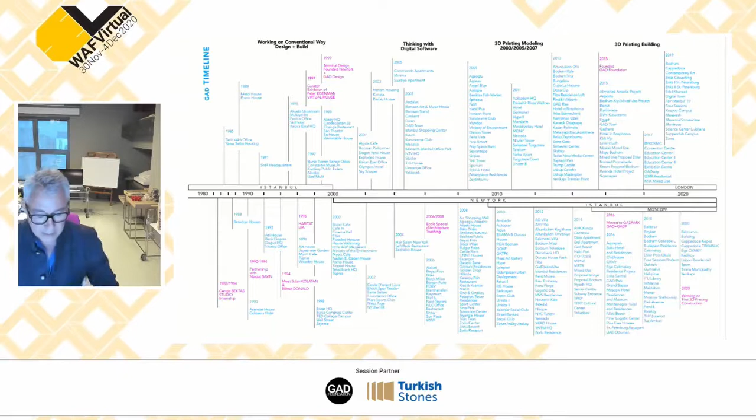I like to work on architecture with stone, because stone is, as I explained, a 12,000 year old fantastic material, and not only material but also a statement tool for architects. What does that mean? The structural statement — you can do something with the structural statement with that material.

As a material, you can do something, also a technical statement, and also an art statement — what we need as architects to do something for our civilization.

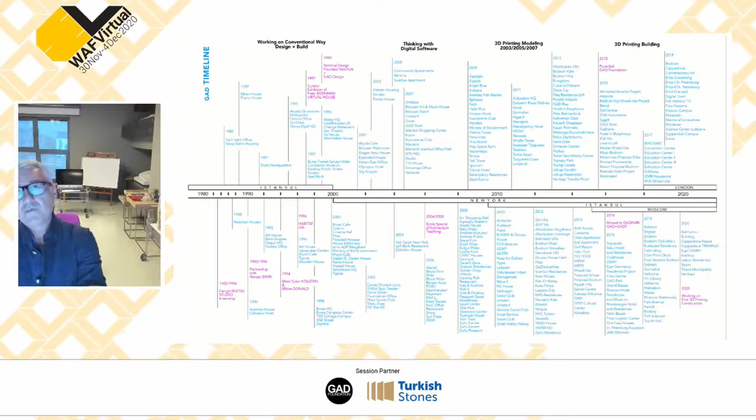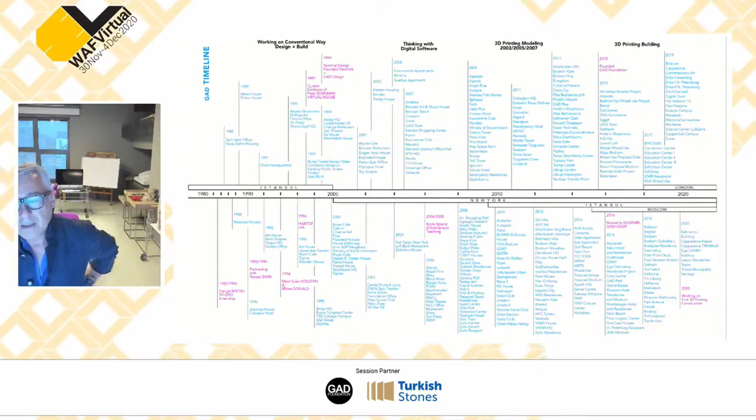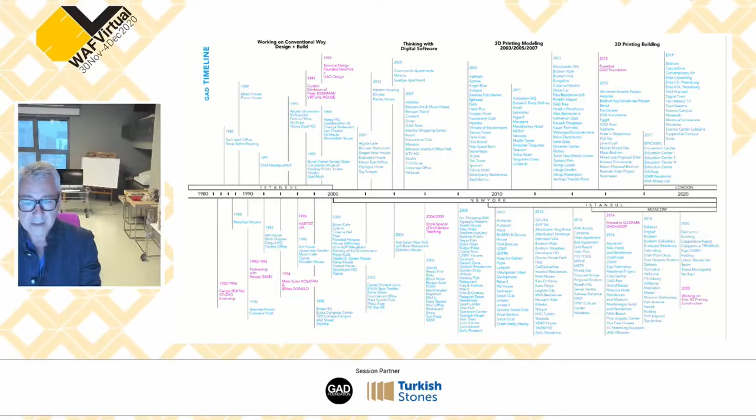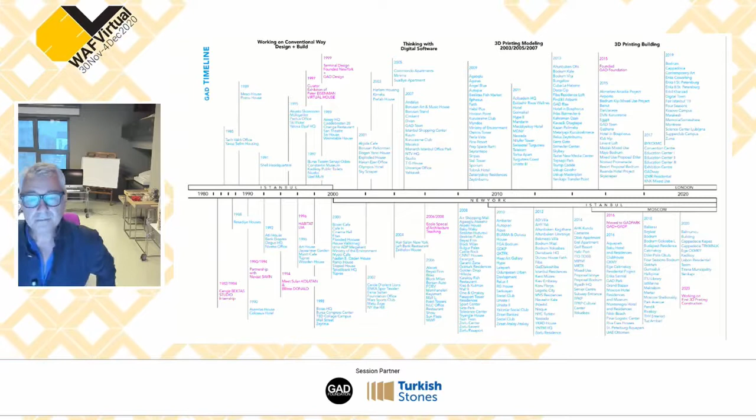When I was a small child, I visited with my family some ancient heritage sites like Ephesus, and also Miletus, Priene and Bergama. It's a different kind of place, and also Cappadocia really influenced me — those places inspired me to do something for people, for our civilization, and also to explain this to myself.

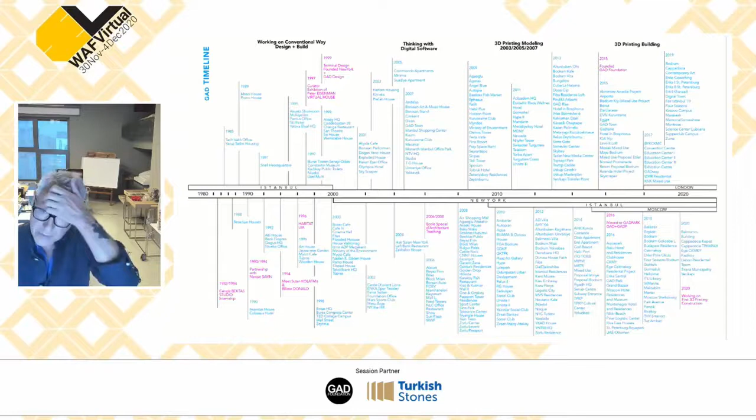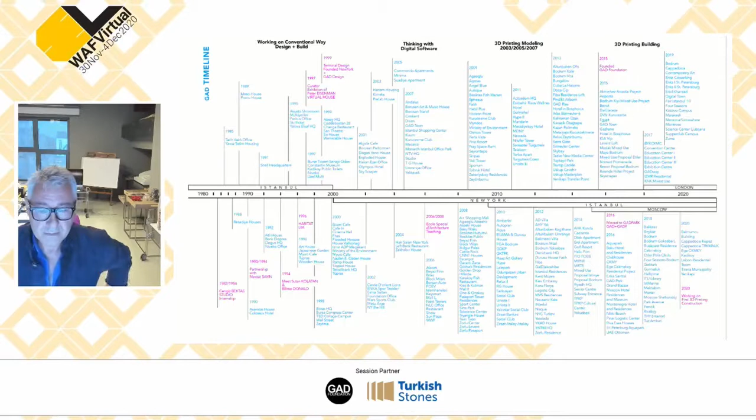What I explained before — designing something, building something, adding something onto our planet, it's a very complicated issue. But at the end of the game, as architects we would like to explain ourselves, our civilization, and our idea with these kinds of statements. Stone helps you do something and explain your idea and civilization to the next generation.

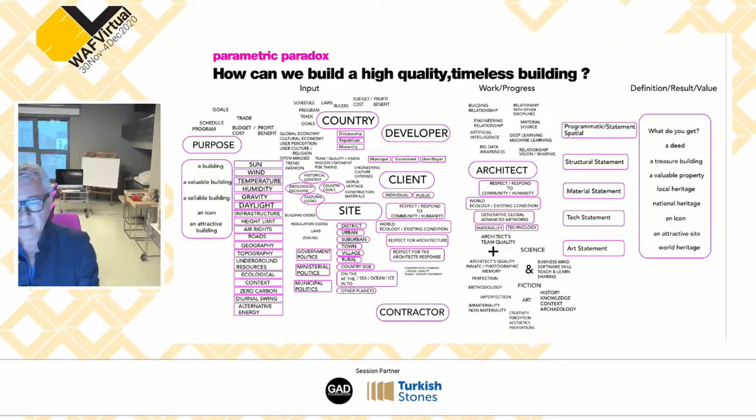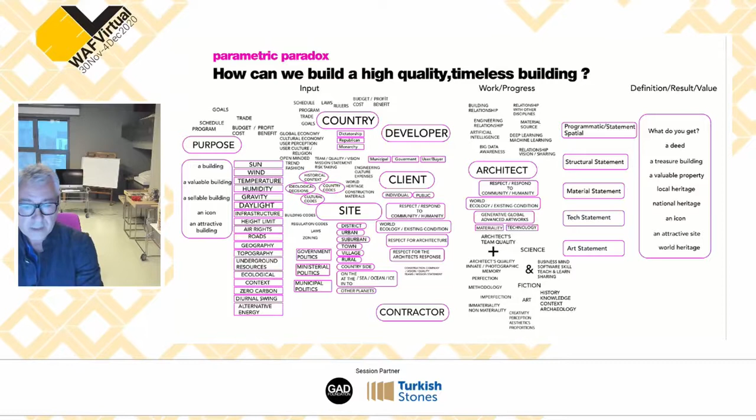Because stone is normally a 30 million year old material, not produced yesterday or last week by machines. It's totally natural, and it gives you ideas. Please next, you can continue.

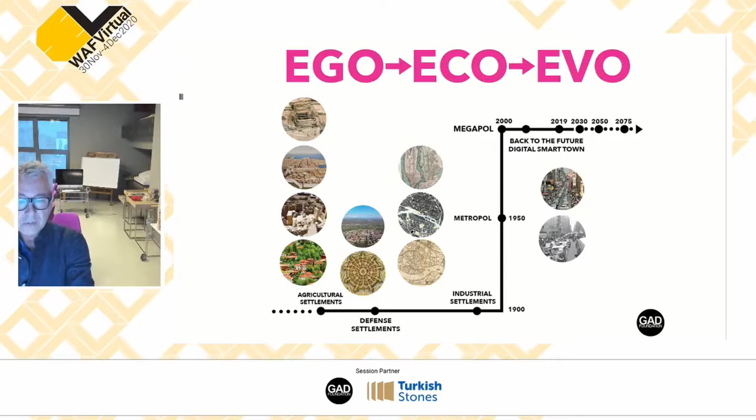Today we are interested in evolution — not just architects making statements about ego, not the ecological things, but we are interested in evolution. I would like to show you some of our projects, what we do, what we did.

We are looking now, in this pandemic time, at what our future cities and dwellings will be.

The first project is in Ortaköy, Istanbul, in the middle of Ortaköy, in the middle of our Bosphorus and our city, surrounded by nature.

What we did was create an architecture, making an architecture, finding a form, and designing not only the building but also giving back to nature what we add to our planet — also as a big garden on the top.

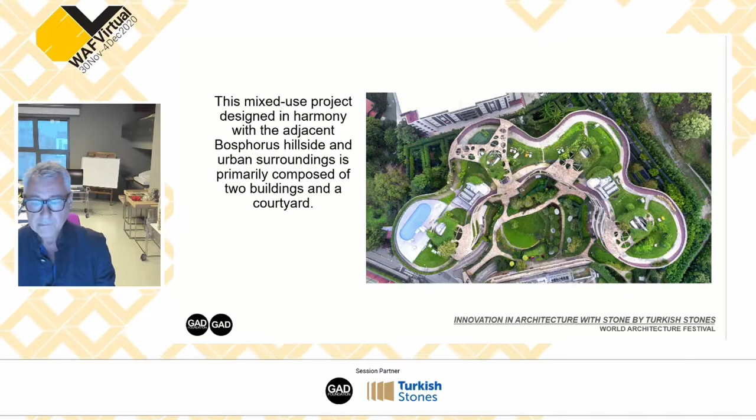We used as material the Turkish stone, let's say the Anatolian stone. I prefer the Anatolian stone — the name is Ünye.

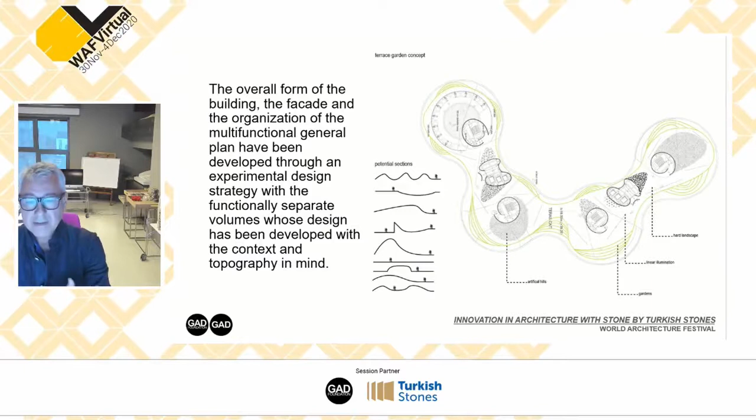You can see we made not only housing projects, but also created an envelope — maybe not only the envelope, but it also gave our architecture not only a shape, but also a garden and a 30 million year old face.

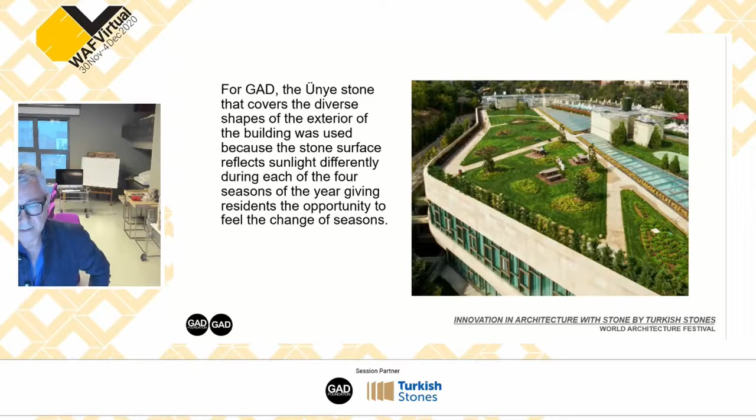Next, please. We used software tools, physical modeling, and also digital modeling for these projects.

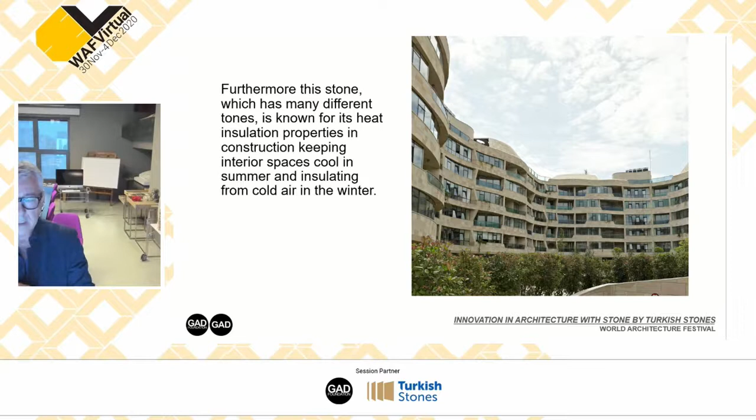What we try to do is give more daylight, and also give more daily life not only to the envelope but also on the top of the building — a sustainable life for our residents.

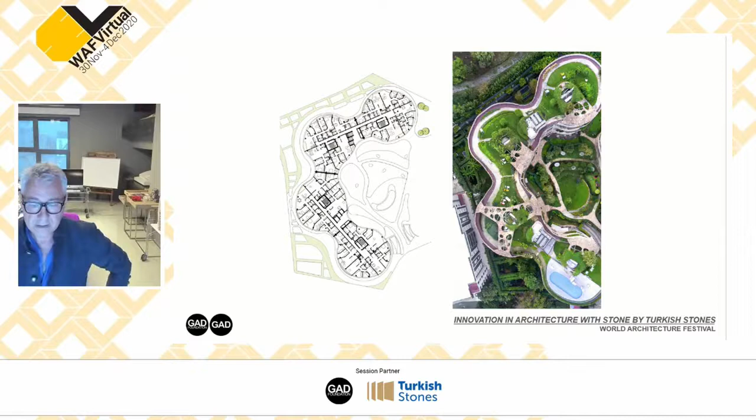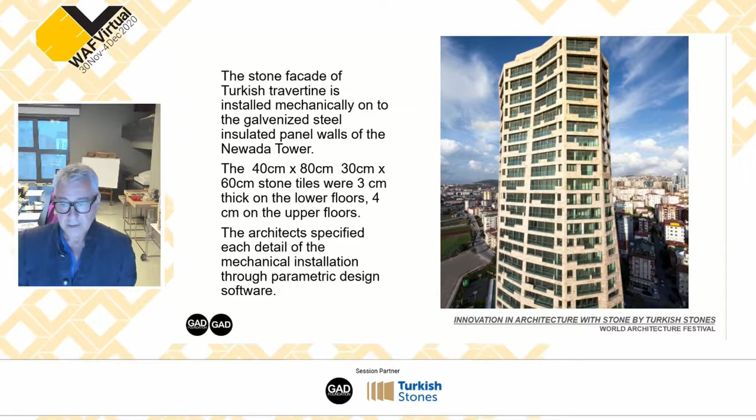Let's move forward to the other projects since time is clicking. There's another project called the Newada, in the same city, Istanbul. The first one was on the European side; this one is on the Asian side. You can see the fantastic view, and we tried giving the building a shape, not just making a form.

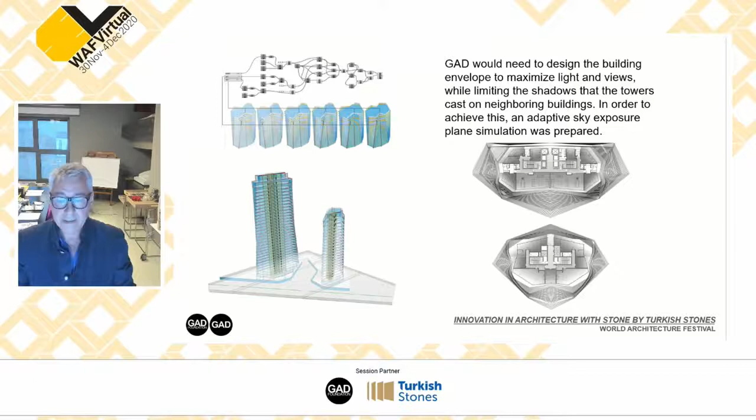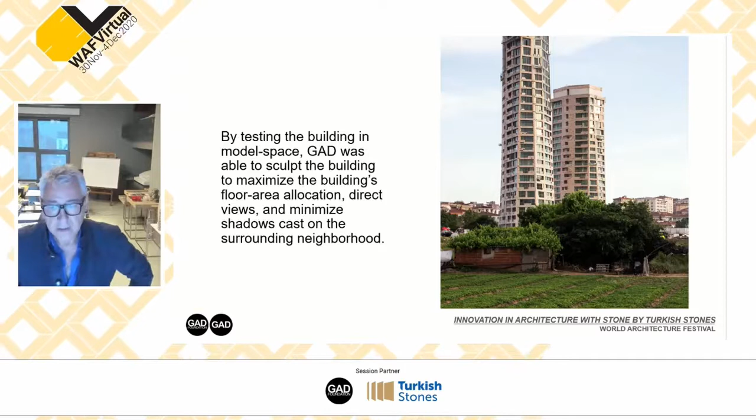Creating the inside with more light, more daylight, more view directed to the sea, and then the Prince Islands. You can see the two buildings with different shapes.

Some details about the facade systems. We always discussed in Istanbul what the weather conditions are like. How can we design like New York or Miami? New York is chilly and it's not easy to create a balcony and outside life. But Miami has the opposite, and Istanbul is in between. Therefore we tried different alternative solutions: a balcony that's protected, but not like New York, not like Miami - in between, let's say.

The third project is about Cappadocia. Gökhan, if you can wrap up in the next minute or so. Okay, next.

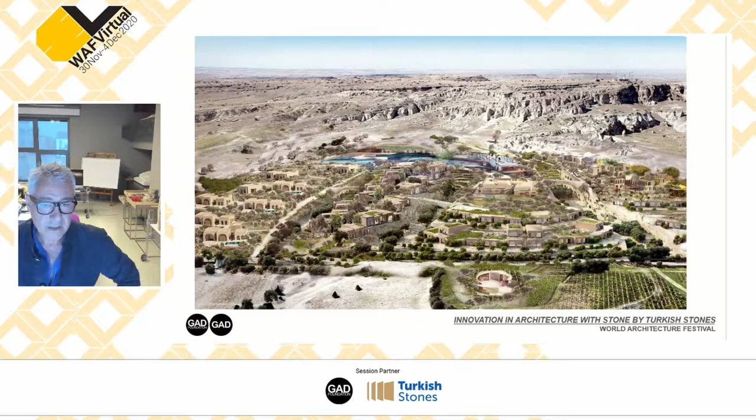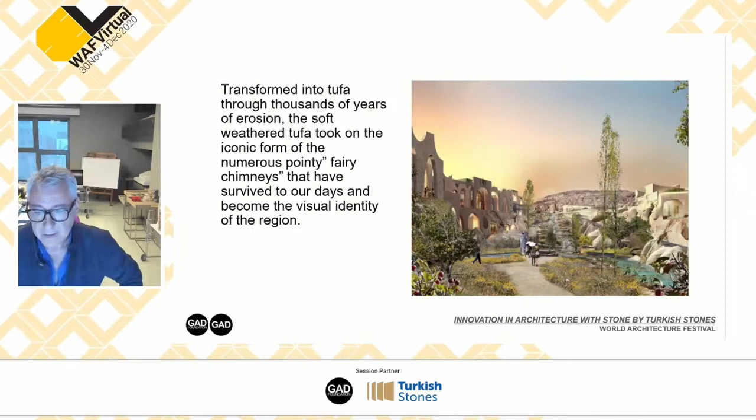Cappadocia is a fantastic place because the existing conditions are fantastic, totally made by stone. You can click to our website and see some details. It's an amazing historic area, and the earth is totally made by nature. We tried using the same materials, the nature materials, to design something.

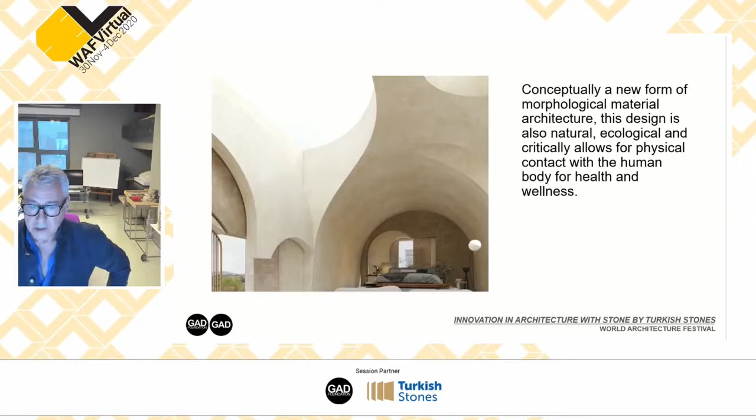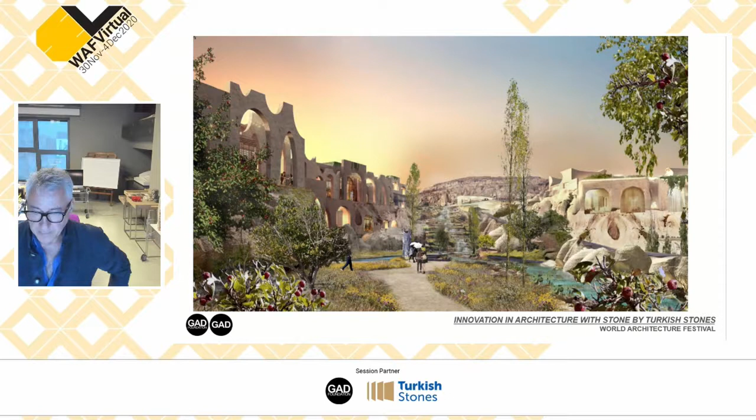So here we can see the Anatolian, wide and deep varieties of natural stone. Here in Anatolia, in Kayseri, we have volcanic type stones, basalts, and different limestones working together.

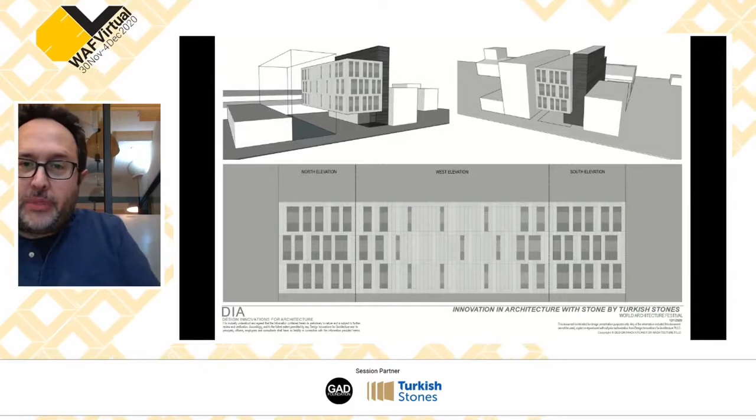Next slide. So the first thing we did, because it's in a flood zone, was hover the tenant floors and put the parking on the ground floor. When we looked at the building, we had the more utilitarian side of the building, the core, pushed to the side, and then the occupant floor plates create like a box, hovering above that vacant ground floor. We thought of this box to be a little more porous - we wanted to bring some porosity to it, but at the same time we were thinking of using this resilient material.

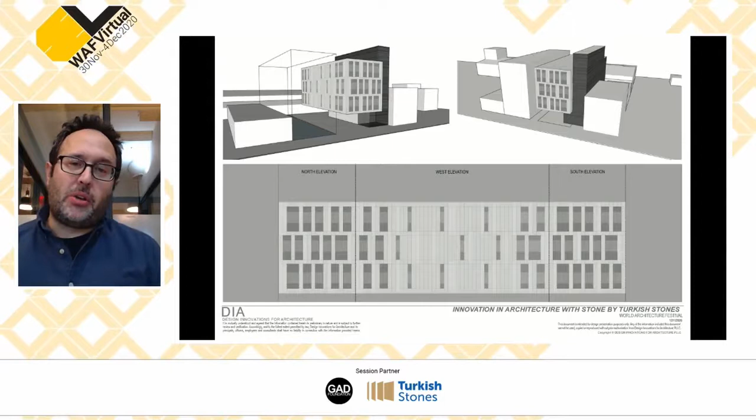Next. So, going hand in hand, we looked for this kind of inspiration in nature - a material we could use on the facade of the building, which is basalt. We were inspired by it. We looked at the basalt columns in nature and how we could use this as a reminiscent of our facade, how it could be more porous to more opaque in this kind of vertical rhythm that we could create. Basalt is also used in manufacturing, in industry - it's something that relates to this building.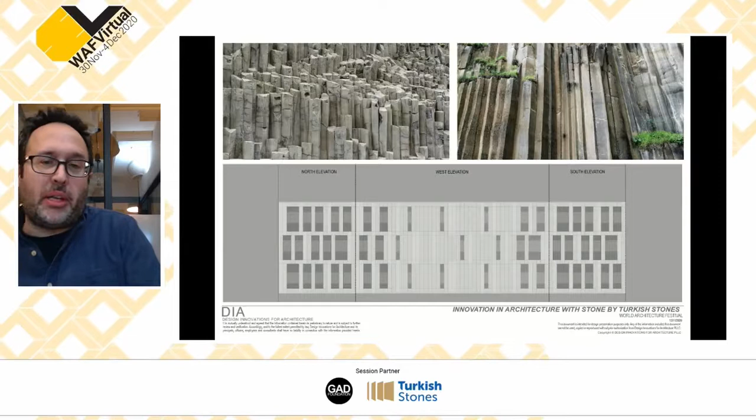Next. Well, we actually looked at basalt, and diabase and gabbro - these are intrusive igneous rocks, while basalt is extrusive. We ended up using diabase because of the color we wanted to blend with other colors in the building, such as highlighting the exterior stair in red, which goes really well with the diabase color. Next.

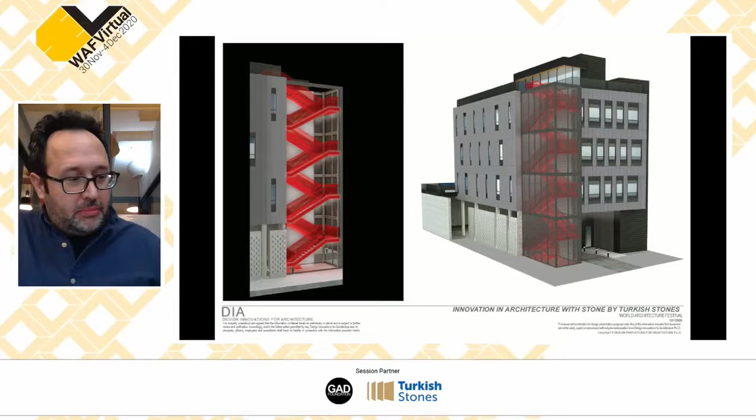So you can see the exterior stair in red color, and we also continue this contrast with the gray, and the shadows and the light and the color, how they can actually create this vibrance.

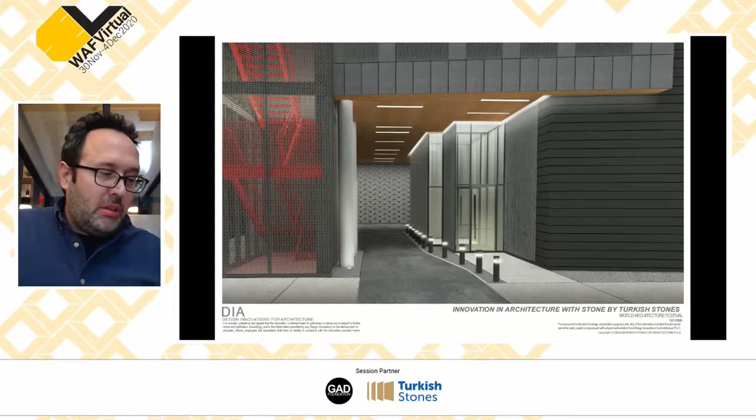One of the feature elements is the hovered ceiling at the ground level. But we didn't stop there - we took it inside, where we also introduced color. Again, another feature element is the interior circulation, the heart of the building inside.

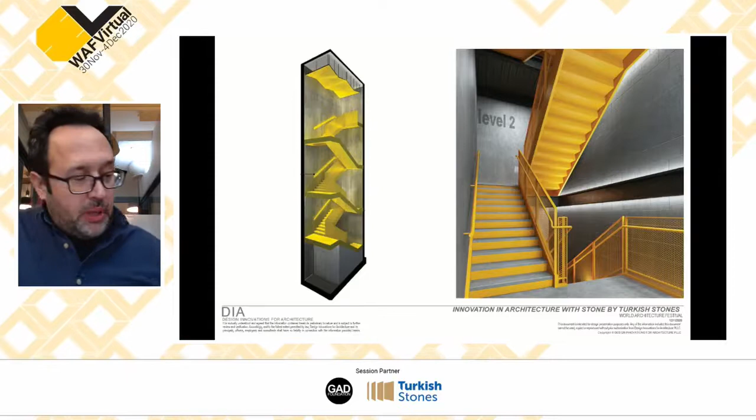And we even got carried away - we were looking at some colored shadows on the CMU blocks of the garage. We made it three-dimensional, and we tried to see if we could actually see the dancing shadows and make them in color.

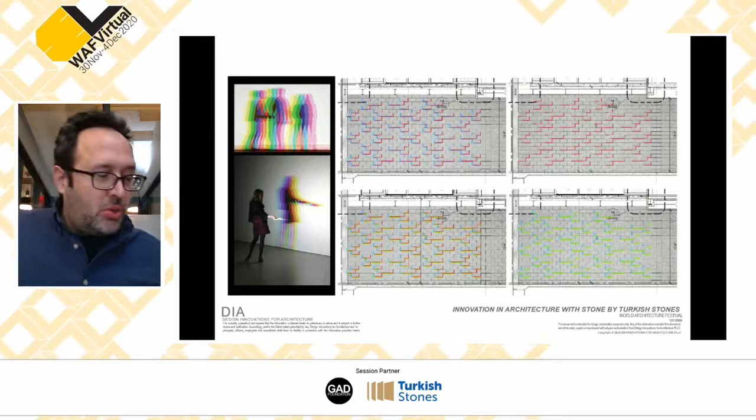Going back to the facade, as I was saying, we were looking for something resilient, and the material itself, basalt, is resilient. But the cladding process, the traditional cladding process of thin veneer stone cladding, is not that resilient. Stone, even though it has enormous compressive strength, is very brittle, especially against wind loads, earthquake, or other blast related forces.

It's very fragile, and to kind of combat against this fragility, the bad thing we do is actually increase the thickness of natural stone. And I always believe that that's kind of an irresponsible way of using stone, as it is not a renewable material. At some point, we will actually consume all the stone on Earth.

So how to use stone more responsibly - I always like the approach where you use the material at its most minimal amount. So we went with using an ultra thin stone base, 5 millimeters thick, and it was bonded to honeycomb backing, reinforced by honeycomb backing.

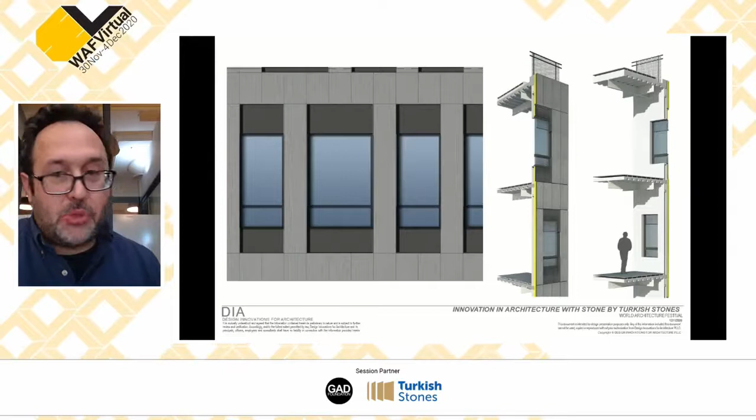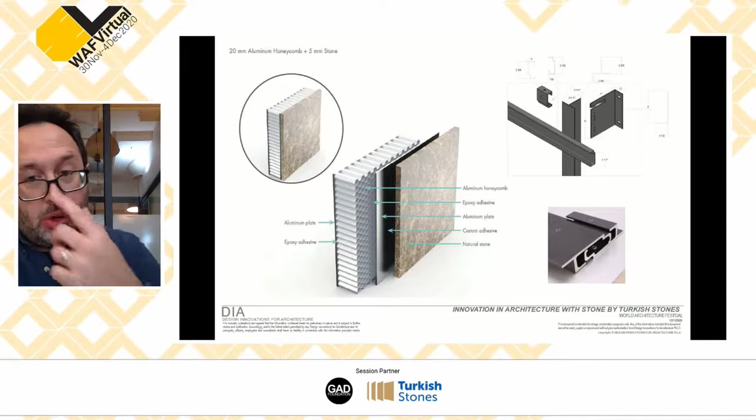That allowed us to create a very light stone cladding facade, and also create a larger cavity where we could have adequate insulation in the cavity, rather than having that behind the substrate. So you see the assembly: the ultra thin stone layer adhered to an aluminum plate, then bonded to honeycomb, and at the back again another aluminum plate, and then this is held by clips hung onto the horizontal struts, and then the vertical strut is connected to the brackets, which is also connected to the metal stud wall.

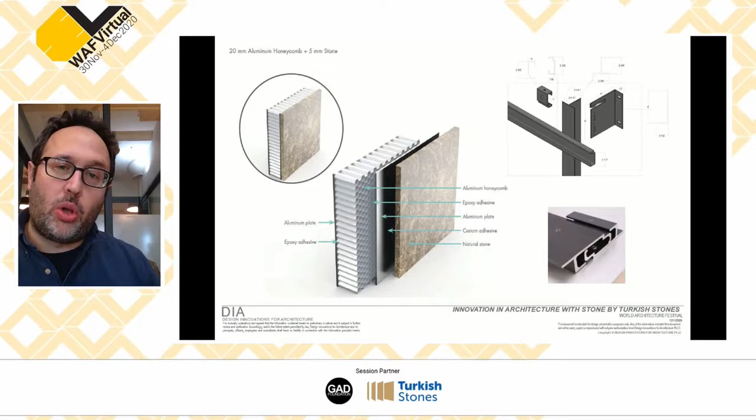This is a very light system compared to the traditional use of thin veneer stone. Usually you got to have 3 centimeter or 1 3/16-inch stone held by robust steel brackets anchored to a masonry CMU wall, or a very heavy-duty steel substrate. In this case, we were able to put the light stone panels directly onto the metal stud wall in our building.

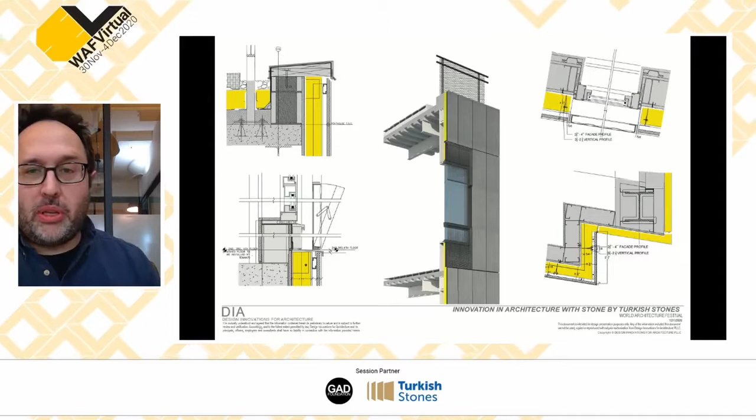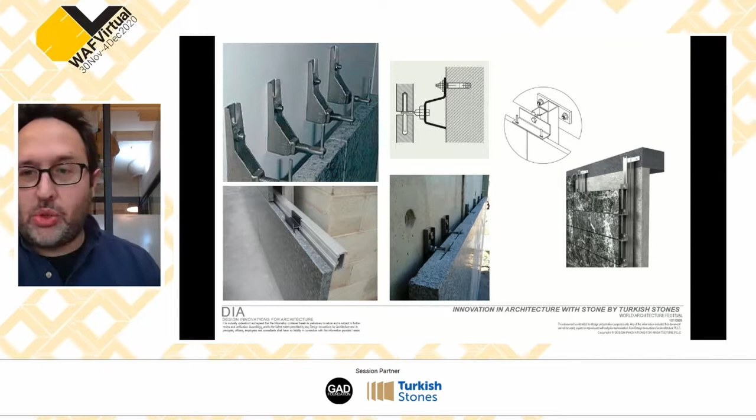Just to show you in comparison, this is the traditional stone cladding, where you actually use mechanical fastening, and the brackets are anchored either to the CMU wall or to a steel framing system at the back.

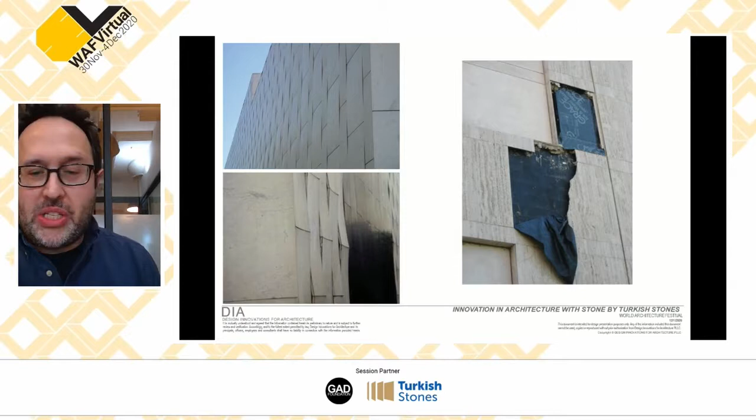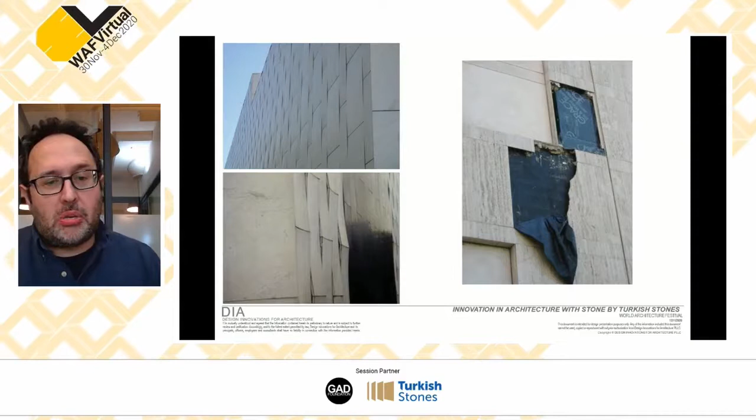Usually when you use a conventional system, it's always safer to go with granite kind of materials - marble or travertine is not suitable for climates where there's heat differentiation seasonally, also throughout the day. So it's kind of constraining, so you always kind of use granite almost always for the facades. But if you use it as an ultra thin veneer with honeycomb backing, you can go back to using travertine, you can go back to using marbles that you were not able to use.

What you see on the slide here is the Finlandia Hall, the concert hall in Helsinki, designed by Aalto. Some people think it's an amazing facade, very three-dimensional, but that's actually the failure of marble, where it doesn't contract back and it just kind of starts warping. And that's one of the issues with using marble stone cladding on the facades.

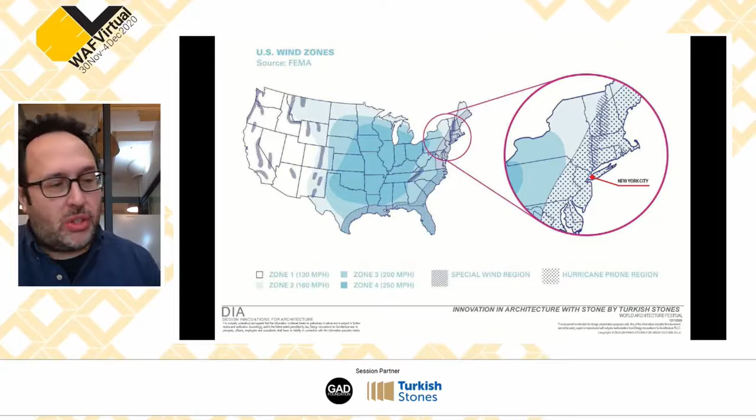You said we got 2 minutes.

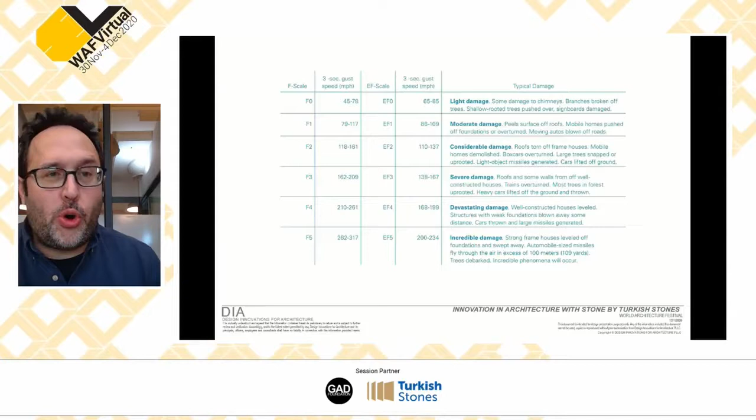And what if it's actually something more than a Category 2 tornado? Well, it's a hurricane, like when we had Sandy that made landfall within the vicinity of New York City. With just a Category 1 hurricane, it caused enormous damage. So it shows that the buildings and the components of the buildings need to be ready for this.

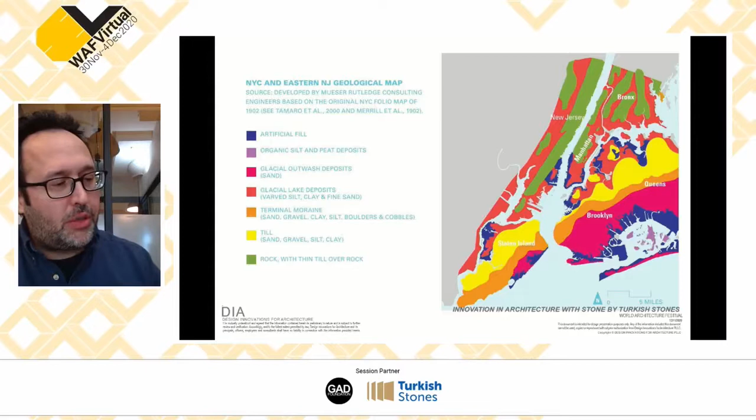This is something also important for earthquake loads. Even in New York, there are small to moderate earthquakes, and it looks like it's going to be increasing. And for that...

Tony? Go ahead, Nizam. Go ahead, Nizam. Yeah, sorry, I heard something.

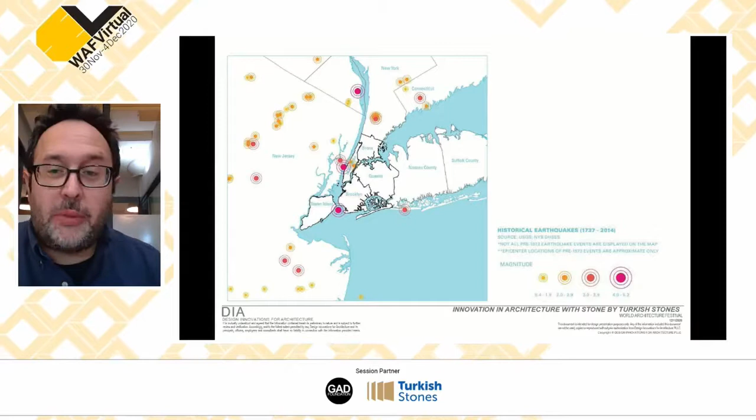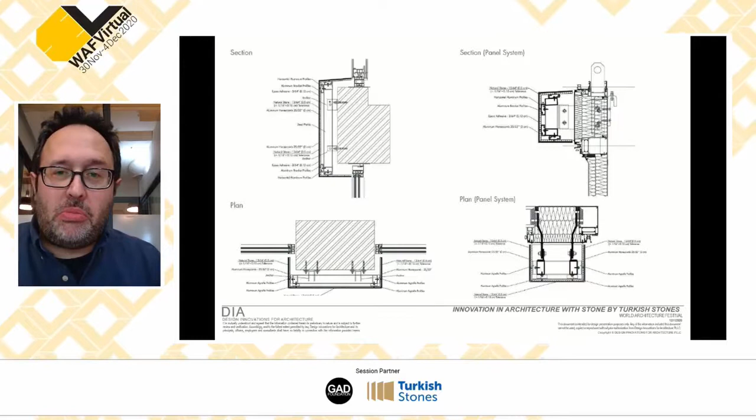So the more important thing about the use of ultra thin veneer stone is you could actually wrap it around structures in a much lighter manner, and you can create depths similar to ancient buildings. You could actually have overhangs, soffits. So that's why in one of our recent projects in New York City, we're studying a facade where we like to use stone, but not as a surface element, but to create that depth that belonged to the times where stone actually created shadow and brought depth to structures. It's kind of like bringing us back to times where the use of stone was celebrated almost in the masonry sense, but while using it in the most minimal amount possible.